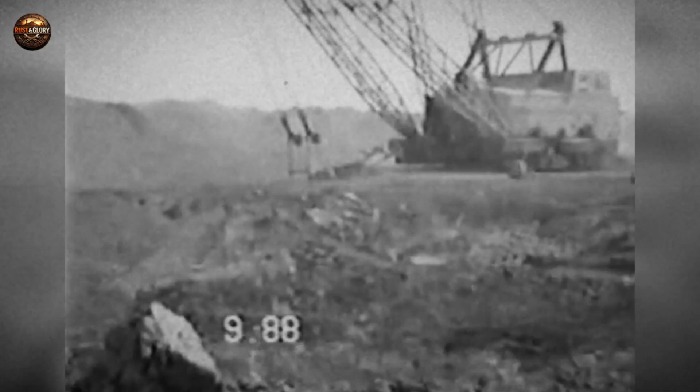In 1969, a machine stood up in Ohio. Not rolled, not crawled, not drove. It stood up. Two steel walking shoes lifted a machine the size of a 22-story building and set it down again, slowly, deliberately, like the earth itself had decided to move.

Its bucket could tear away 220 cubic yards at a time. Its body weighed roughly 13,500 short tons. When it crossed a coal field, it did not look like equipment. It looked like industrial civilization stepping out into the open and revealing what it really believed about the world. Its name was Big Muskie.

And the easy version of this story is that Big Muskie was the largest dragline ever built. That is true, it is also incomplete. Because Big Muskie did not come from a military giant, or a Silicon Valley fantasy, or a government moonshot. It came from a factory in South Milwaukee, Wisconsin, a lakefront industrial town of roughly 20,000 people. A place built around a company that started with an abandoned foundry, a banker who could read patterns, and a master mechanic who could turn those patterns into steel.

That company survived the collapse of one century and the rise of another. It helped dig the Panama Canal. It built machines for two world wars. It created some of the largest self-propelled machines ever to move on land. It overexpanded, broke, restructured, consolidated an industry, got absorbed by a larger empire, and then watched its own factory fall silent in 2016 after 123 years of production.

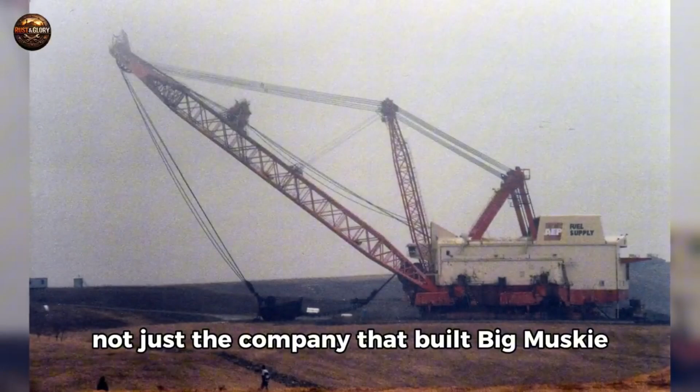This is the story of Bucyrus-Erie. Not just the company that built Big Muskie. The company that taught America how to move the ground beneath its own feet.

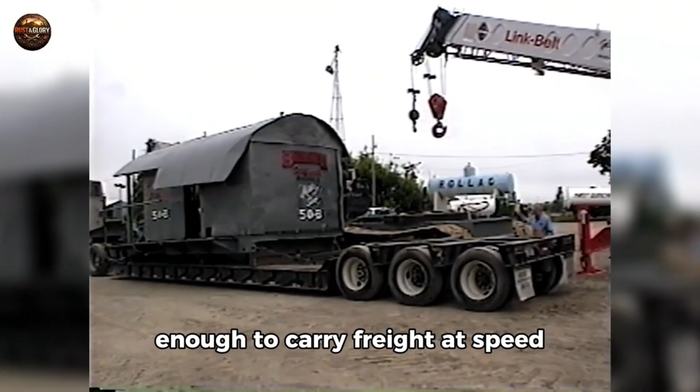The story begins in the 1880s, when the United States was not yet a settled industrial power so much as a country under violent construction. Railroad mileage exploded in the decades after the Civil War. New lines pushed westward, southward, and through places that, on a map, looked abstract until somebody had to cut through rock, grade a bed, lay track, and hold the whole thing stable enough to carry freight at speed. Every mile of railway represented an engineering problem, but it also represented an excavation problem, and excavation at continental scale was still primitive.

There were patents. There were ideas. There were a few builders. There was not yet a mature industry capable of meeting what the country was asking of it. That was the opportunity Daniel P. Eells saw. Eells was not a classic inventor-founder.

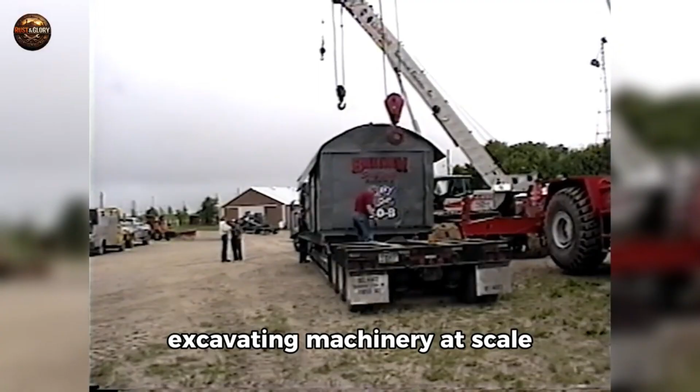He was a banker, an organizer, a man whose real gift was reading where future demand would outstrip present supply. He moved through rail and coal circles in Ohio, watched the way capital flowed, and learned something more valuable than mechanics, where the bottlenecks were. He understood that the United States was going to need far more digging power than its small collection of foundries and machine shops could provide. He also understood that whoever could build reliable excavating machinery at scale would not simply sell equipment. They would attach themselves to the physical creation of the country.

In December 1880, Eells and his associates acquired the abandoned Bucyrus Machine Company in Bucyrus, Ohio for $17,000. Even now that figure sounds modest. At the time it was still a gamble, but not a reckless one. The foundry existed. The rail connections existed. The industrial demand existed. What did not yet exist was the right product and the right technical leadership.

So Eells made the first great decision of the company's history. He hired John Thompson. If Eells was the pattern reader, Thompson was the mechanic. He knew machines from the inside out. He understood how metal behaved, how systems failed, how production translated drawing into object.

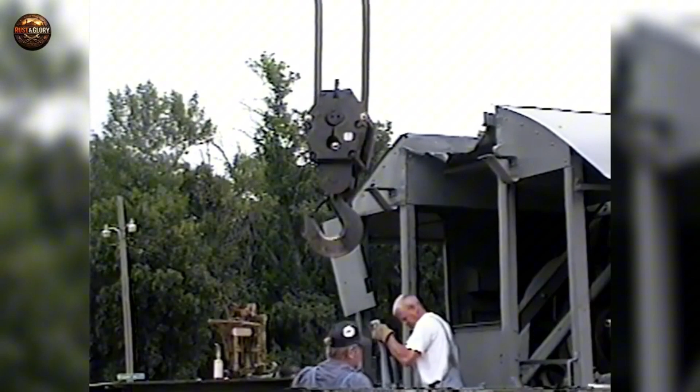The division between them was clear and unusually disciplined. Eells controlled capital, markets, and direction. Thompson controlled the technical core. Neither pretended to be the other. That mattered because many industrial companies destroy themselves by blurring genius and authority. Bucyrus began by separating them.

At first, the company made ordinary railroad hardware, wheels, switches, cylinders, handcars, solid work that paid bills but created no durable edge. Eells watched those years carefully and recognized the danger. Standard parts can keep a shop alive, but they also make it replaceable. Another shop can always learn to do the same thing. Another foundry can always bid slightly lower. A business like that survives on habit until the market decides habit is not enough.

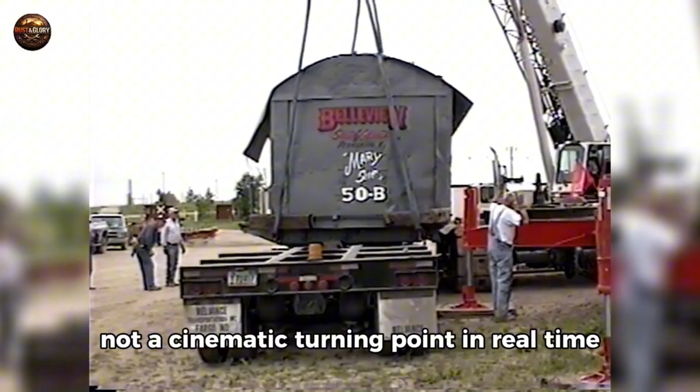The opening came with a railroad order for a steam shovel. Not a giant contract, not a cinematic turning point in real time. Just the kind of order that only becomes historic in hindsight. Steam shovels already existed, but the existing designs still carried serious limitations.

They were useful and clumsy at once. Thompson saw where they wasted motion. Eells saw what that wasted motion meant commercially. Thompson redesigned the machine around rotation and versatility. Instead of forcing the entire machine to reposition every time the digging direction changed, the upper structure could swing around its axis.

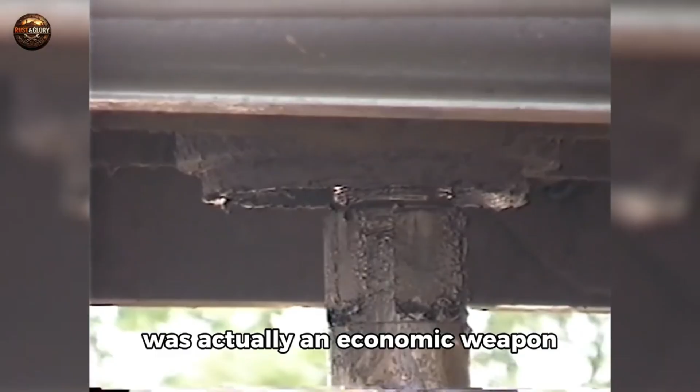Instead of serving one narrow role, the machine could function as both shovel and derrick. What looked like mechanical refinement was actually an economic weapon: less dead time, broader utility, more work per crew, more value per machine. Eells understood immediately what this meant.

He cut away the distractions. Standard railroad products were no longer the center of the business. The company would go deep, not broad. Shovels, cranes, dredges—nothing else deserved the same attention. That kind of aggressive specialization often looks reckless while it is happening.

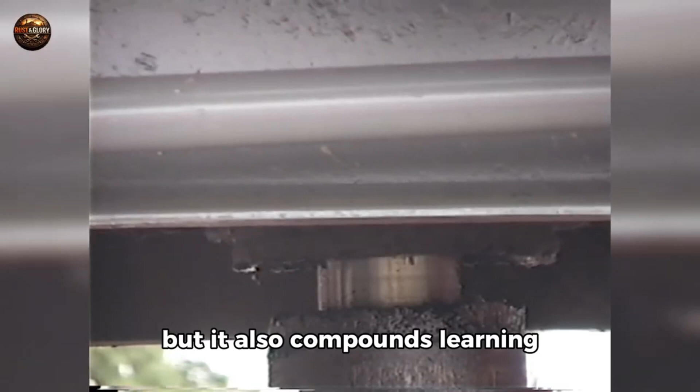It narrows revenue, increases dependence, and frightens cautious people. But it also compounds learning. Every machine teaches the next one. Every problem solved becomes a barrier for competitors. Every field repair becomes engineering memory. A company that keeps dividing its attention can stay busy. A company that concentrates it can become irreplaceable.

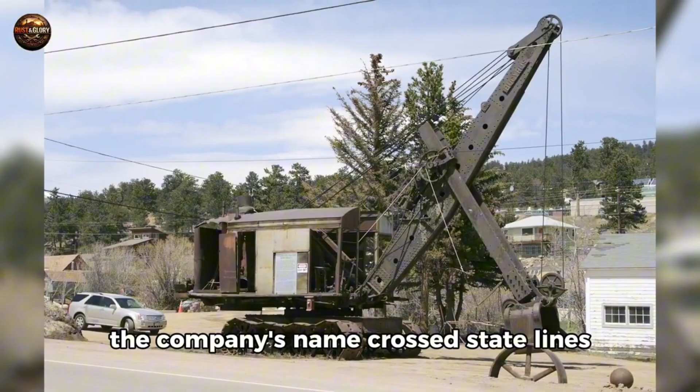In 1883, Thompson's consolidated steam shovel and derrick won first prize at the National Exposition of Railway Appliances in Chicago. The importance of that moment was not the medal itself. It was that a relatively small Ohio firm had publicly demonstrated that it was building excavating equipment of national significance. Orders began to move beyond local networks. The company's name crossed state lines. Reputation, once established in heavy industry, tends to travel farther than advertising ever can.

By the late 1880s, Bucyrus had extended into dredges as well. That move opened harbors, canals, riverwork, and a whole new class of infrastructure contracts. The machines were different in application, but the core advantage was the same. The company was developing deep, repeatable expertise in moving enormous quantities of material under difficult conditions. That, in the end, was the real founding product. Not a single shovel. Not a single patent.

A business model built around hard-to-copy competence. Eells had found the thing he was looking for when he bought an abandoned foundry: a moat made not of money, but of accumulated know-how. Success created the next crisis. The original Bucyrus Works in Ohio proved the company could build a market. It could not support the scale that market was demanding.

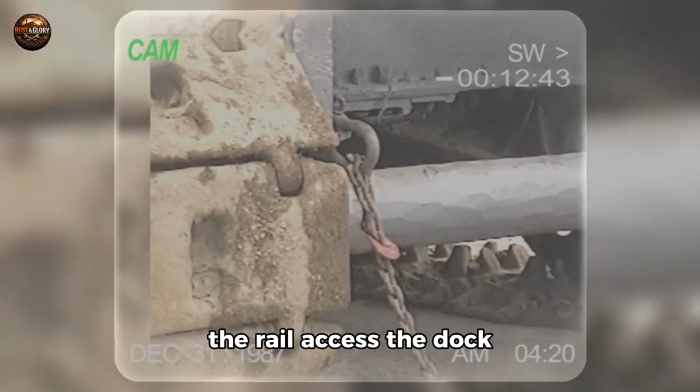The site was too constrained. Expansion land was limited. Transport options were inadequate for the size of the machines the company was beginning to imagine. Heavy industrial success has a physical requirement that modern business often forgets: you cannot scale large machinery abstractly. The building, the yard, the rail access, the dock, the craneage, the raw material flow, the assembly space—these are not background conditions.

They are the business. In 1891, South Milwaukee offered Bucyrus a future in one package: cash, land, dock access, rail access, worker housing opportunities. A city willing to move Chicago road itself to make the site workable. That last detail tells you almost everything. Municipalities do not reroute roads for ordinary tenants. They do it when they believe a factory is going to become the anchor of their future.

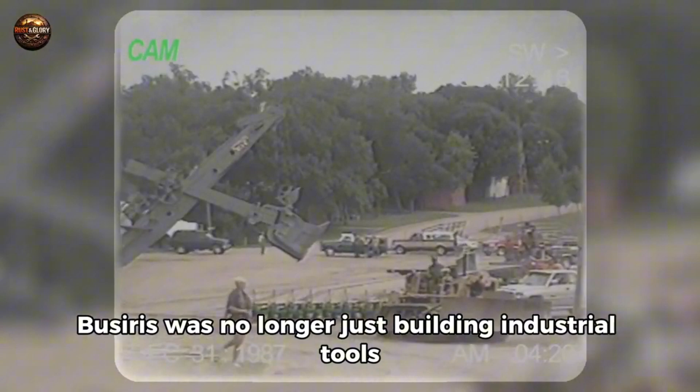Eells saw what South Milwaukee offered that Bucyrus, Ohio could not: access to both inland America and the wider world. Railroads carried heavy machinery into the continent. Lake Michigan linked the company to the Great Lakes and onward routes beyond them. Bucyrus was no longer just building industrial tools. It was building objects so large that geography itself had become part of the manufacturing equation.

The move was formalized in 1891. The new South Milwaukee operation opened in 1893. More than a relocation, it was a transformation. In Wisconsin, the company began to assume the form that would define it for more than a century: a self-contained heavy manufacturing complex tied intimately to a town that would grow around it.

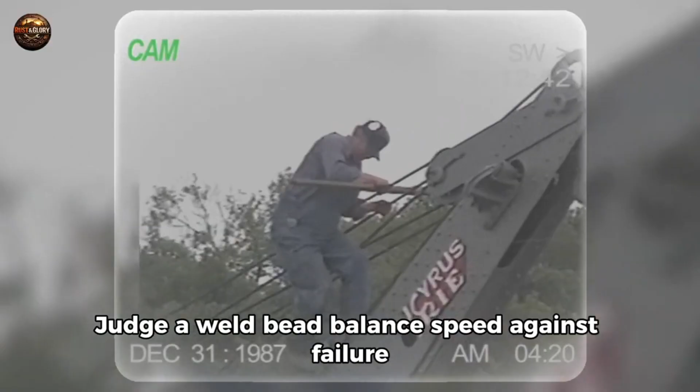The workers who filled the plant in its early decades were largely immigrants and the children of immigrants: Polish, German, Armenian, Bohemian, and others who brought with them not only labor but working traditions, mechanical habits, and foundry discipline. Industrial America is often narrated through products and executives, but factories are really memory systems carried in bodies. Somebody teaches somebody how to set a tolerance, pour a casting, listen for trouble in a drive, judge a weld bead, balance speed against failure. That sort of knowledge rarely appears in annual reports.

It is why some factories can survive shocks others cannot. Bucyrus understood early that labor stability was not a soft issue. It was a structural one. Between the 1910s and 1920s, the company did something unusual and profoundly strategic. It invested in the surrounding environment of work: homes, utilities, community infrastructure, the Bucyrus Club, and the broader civic fabric that helped bind workers to place.

This was not philanthropy in the sentimental sense. It was industrial statecraft at town scale. A worker who owns a house near the plant, whose children grow up in the local schools, whose neighbors also work at the same factory, is less likely to disappear the first time another employer offers a marginal wage premium.

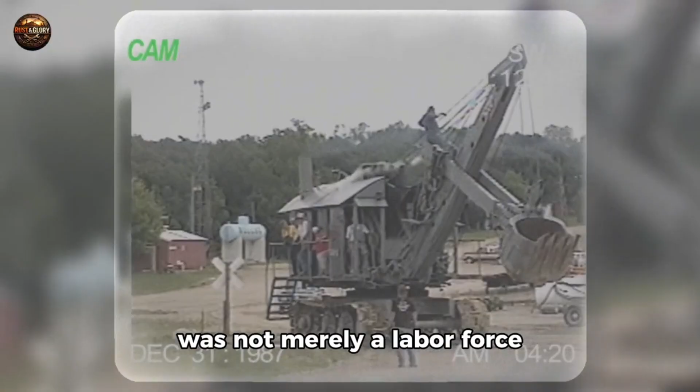What Bucyrus built in South Milwaukee was not merely a labor force. It built continuity. By the early 20th century, the plant had become an integrated industrial organism. Foundry, forging, fabrication, machining, assembly, shipping, as much as possible brought under one system, one roof, one culture. That mattered because the machines were increasing in size, complexity, and consequence.

Customers did not want a glamorous promise. They wanted equipment that worked in mud, water, frozen overburden, tropical heat, remote mines, and places where failure meant ruinous delay. Factories earn myth when they consistently do that kind of work.

The effect on South Milwaukee was total. Bucyrus became the city's dominant industrial fact. Generations moved through its gates. Street names, housing, local businesses, clubs, and civic identity all bent around the plant.

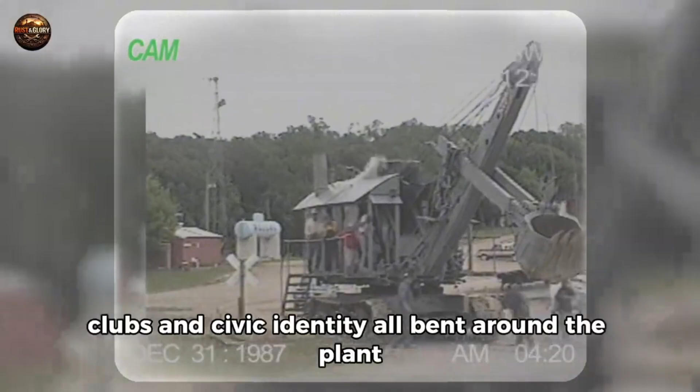This is the part of industrial history that often gets flattened into statistics. Payroll numbers matter. Output numbers matter. But what a great factory really does is organize time. Shifts determine traffic. Paydays determine downtown business. Hiring waves determine school enrollments. Retirements shape neighborhood age. The building becomes a clock and a center of gravity.

When people later said South Milwaukee did not simply lose jobs when the plant went silent, they were saying something precise. They were saying the city lost the institution around which ordinary life had been arranged for over a century.

That sort of dependence is dangerous. It is also exactly what made the place powerful. Because once the town and the factory were bound together, Bucyrus could accumulate something even more valuable than contracts: intergenerational skill. Sons followed fathers. Sometimes daughters followed mothers. The work culture thickened. The company became better because the town kept feeding it people who had already spent years hearing about the machines at dinner tables and seeing what factory discipline looked like from childhood.

Modern management language would call this a talent pipeline. South Milwaukee called it life.

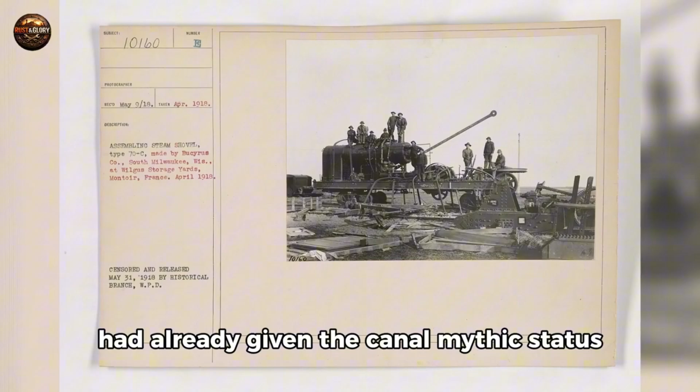There are contracts that pay well, and there are contracts that permanently alter how the world perceives you. For Bucyrus, that contract was Panama. The French failure in the 1880s had already given the canal mythic status before the United States even took over. Disease, landslides, corruption, mud, heat, and engineering overconfidence had turned the project into one of the great modern cautionary tales.

When the United States assumed control in 1904, the canal became more than an infrastructure project. It became a national demonstration of competence. The task was straightforward on paper and brutal in practice. Cut through unstable tropical terrain, remove staggering quantities of material, control disease, and prove that American industry could finish what European ambition had not. What the canal needed was not just manpower.

It needed dependable digging power on a scale large enough to convert ambition into measurable excavation. Bucyrus became central to that effort. The figures are still striking more than a century later. Bucyrus supplied 77 of the 102 steam shovels used on the Panama Canal. That meant roughly three-quarters of the mechanical excavation power on the most important construction project in the world came from one factory in South Milwaukee.

When you combine heritage lines later absorbed into the company, the institutional footprint is even larger. But even using the cleanest conservative number, the dominance is obvious. These were not ornamental machines. They were 95-ton working beasts with 5 cubic yard buckets, mounted on temporary rails and operated in conditions that punished both metal and muscle.

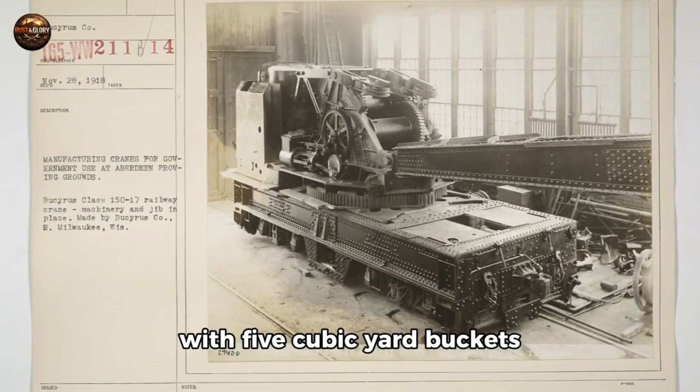Crews labored through tropical heat and mud, moving track as the machines advanced, feeding boilers with coal, maintaining operation amid a landscape that collapsed without warning. Landslides at Culebra Cut could bury equipment and erase days of progress overnight. Every ton removed had to be wrestled out of a living geology that refused to stay where it had been cut.

This is why Panama mattered so much to Bucyrus's reputation. The canal was not a clean technical demonstration. It was a chaos test. A machine that performs under controlled conditions proves good engineering. A machine that performs in Panama proves something closer to legitimacy.

The output numbers tell that story with more force than rhetoric can. In March 1910, a Bucyrus shovel at Culebra Cut excavated around 70,000 cubic yards in 26 days, a project record. Across the life of the canal job, individual Bucyrus machines averaged over 1 million cubic yards moved. These were extraordinary performances not because they were achieved in calm conditions, but because they were achieved in one of the worst work environments on Earth.

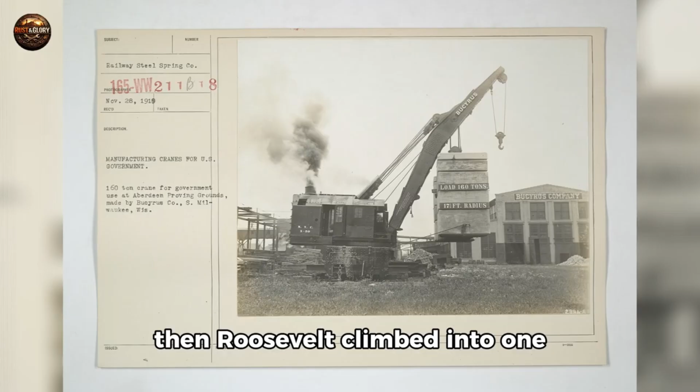Then Roosevelt climbed into one. In November 1906, Theodore Roosevelt visited Panama and sat at the controls of a Bucyrus shovel. The photograph of the president on that machine became one of the iconic images of the canal era. It worked as politics, theater, and advertising all at once.

Bucyrus did not need a slogan after that. If the President of the United States wanted to be seen inside your machine while inspecting the greatest construction project of the age, your brand had already crossed into symbolic territory.

Panama did not make Bucyrus technically capable. It proved that capability at the highest level available. And once that proof entered the world, the company's market position changed. It no longer had to argue from theory. It could argue from fact.

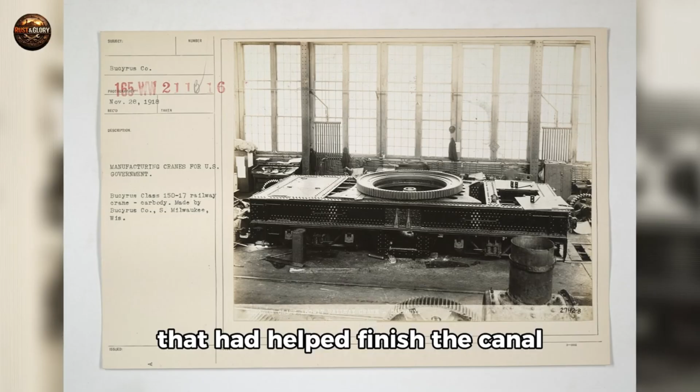These were the machines that had helped finish the canal. These were the machines that had survived tropical slides, punishing cycles, and round-the-clock work while the world watched. Every future sales conversation took place in the shadow of that achievement.

That is how reputations become industrial assets. They lower customer anxiety. They justify premium pricing. They attract talent. They turn a regional manufacturer into a world reference point.

Panama also clarified a deeper truth about Bucyrus that would remain true into the age of Big Muskie. The company's real product was not merely machinery. It was large-scale reliability under harsh conditions.

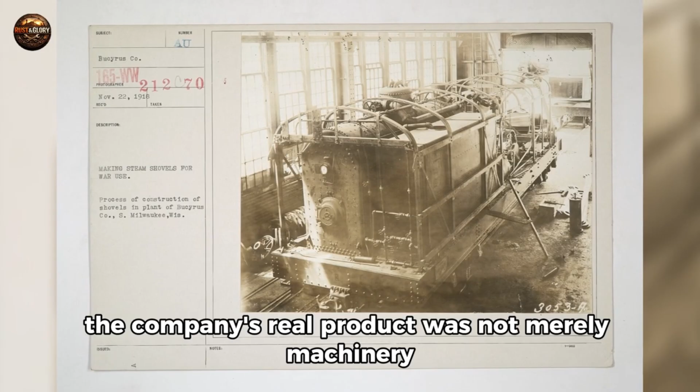Plenty of firms can build something impressive once. Far fewer can build systems customers trust when delay costs millions, failure destroys schedules, and replacement is not practical. By the time the canal opened in 1914, Bucyrus had crossed that threshold.

The company was no longer just an American excavating manufacturer with a strong catalog. It had become one of the names by which the world understood heavy excavation itself. That status would carry it through two wars, multiple technological transitions, the rise of strip mining, and the age when size itself became the next battlefield.

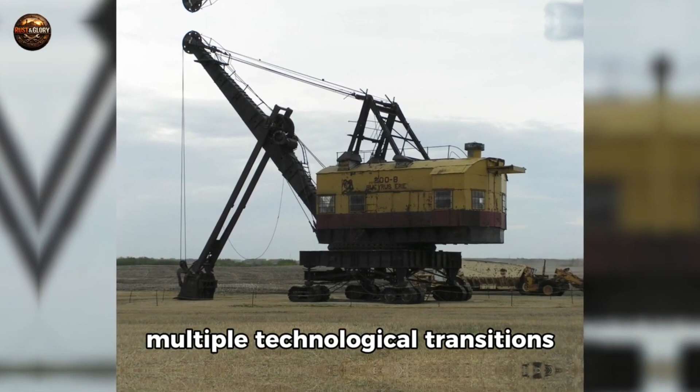Factories reveal their real character when the world changes faster than they expected. For Bucyrus, the first great stress test after Panama was war. The First World War shattered the peacetime logic of industry.

Plants that had specialized in building one class of machinery were suddenly asked to produce something else entirely: artillery components, logistics equipment, precision metal parts for military systems that could not tolerate improvisation. Bucyrus had not been founded to build weapons, but it possessed the two attributes wartime production valued most: precision and adaptability.

It could machine accurately, scale quickly, and reorganize without forgetting what it already knew. During the war years, the company turned significant portions of its capacity toward military output, including shell work, recoil components, railroad equipment, and heavy systems that made modern industrial war possible.

The deeper lesson was not what specific parts it built. It was that the factory could reconfigure itself at speed without collapsing into disorder. That ability matters in heavy industry more than people sometimes realize.

Large factories are not nimble by default. Their strength is repetition. Their danger is rigidity. Bucyrus repeatedly avoided that trap because its internal culture was built around engineering problem-solving rather than mere line repetition. The workforce understood metal, fit, load, and failure at a level that let management redirect production without starting from zero.

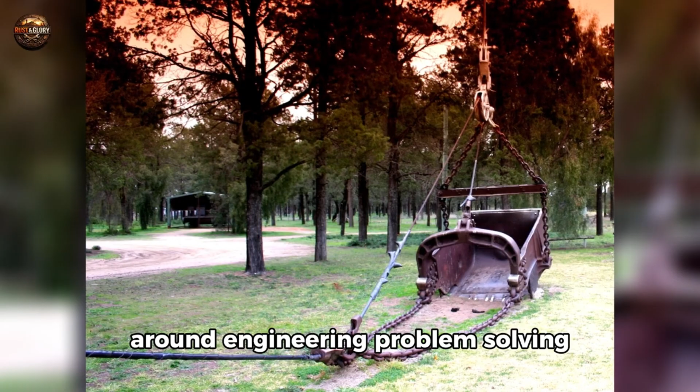When the war ended, Bucyrus did not simply return to normal. It returned with a sharper sense of what the future of excavation required. Steam had carried the company far, but steam also imposed limits.

It required constant management, fuel handling, warm-up, and a relationship between operator and power source that was inherently less stable than what electrification promised. At the same time, excavation itself was evolving. New mines, new terrains, and larger surface operations demanded machines that were not just powerful, but mobile and predictable.

Several developments in the 1910s and 1920s pushed Bucyrus toward a new era. The first was the dragline. Dragline logic changed the relationship between machine and material.

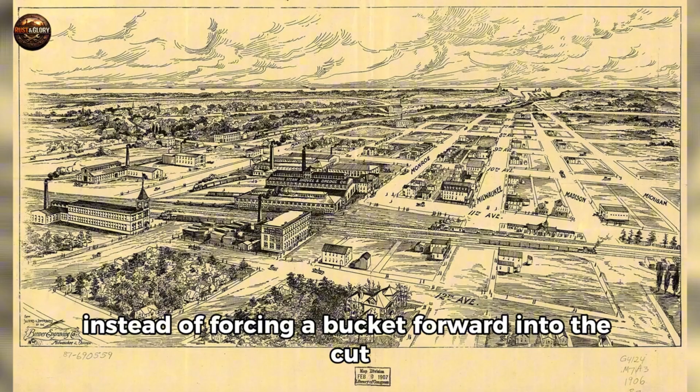Instead of forcing a bucket forward into the cut, the machine cast it out and dragged it back. That sounds like a technical distinction fit for engineers, but it opened enormous commercial possibilities. Soft ground, waterlogged sites, and stripping operations where push-style excavation became inefficient all suddenly favored a different family of machines.

Bucyrus's acquisition of rights and technologies in this space was not just an addition to the catalog. It was a recognition that surface mining was beginning to demand different motion.

The second shift was mobility. Tracked crawlers liberated machines from the tyranny of temporary rails. Rail-mounted excavation had been effective, but it also imposed its own slow ritual of movement: lay track, advance, reset, repeat. Crawler systems allowed machines to reposition without rebuilding infrastructure beneath them at every step.

In mining, that meant time. In construction, that meant flexibility.

In sales, it meant a company could promise something new, not merely power, but maneuverability at scale. The third shift, and perhaps the most consequential, was electricity.

Steam did not disappear overnight, but electrical systems offered advantages that became impossible to ignore. Torque arrived differently. Output steadied. Fuel logistics simplified. Operating precision improved. Maintenance regimes changed. What had once been a great steam engineering company began to become something else: a builder of

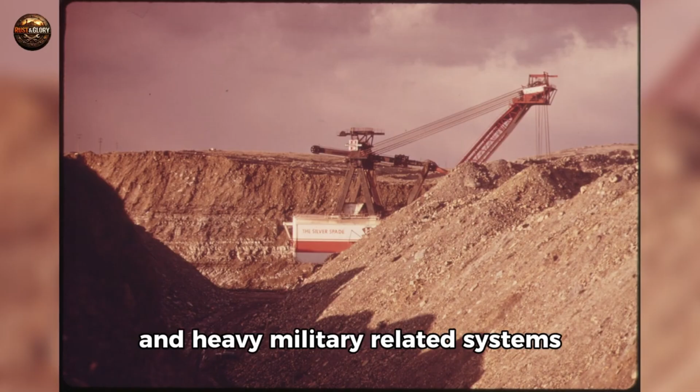The point is not to romanticize wartime conversion. It was disruptive, exhausting, and imposed from outside. But it confirmed a pattern that had now defined Bucyrus for decades. When the world changed suddenly, the company did not freeze. It reorganized.

After 1945, that mattered enormously. The post-war years were not simply about reconstruction. They were about scale. Demand for minerals, energy, steel, infrastructure, and mass movement of earth expanded with extraordinary force. The machines customers wanted in the late 1940s and 1950s were bigger, more durable, and more specialized than the ones

the company had sold before the wars. Bucyrus was ready not because it had predicted every detail, but because the wars had forced it to become a factory capable of changing form without losing identity. This is the crucial distinction. A factory can be flexible because it lacks a center, or it can be flexible because its center is strong enough to survive change. Bucyrus belonged to the second category.

It remained, through all those transitions, committed to one basic domain: moving impossible amounts of earth and material with machines that had to work under conditions where excuses were worthless. By the middle decades of the 20th century, the company had accumulated something very few manufacturers ever do. It had a reputation, a workforce culture, and a technical base robust enough to absorb shocks while still pushing into new frontiers.

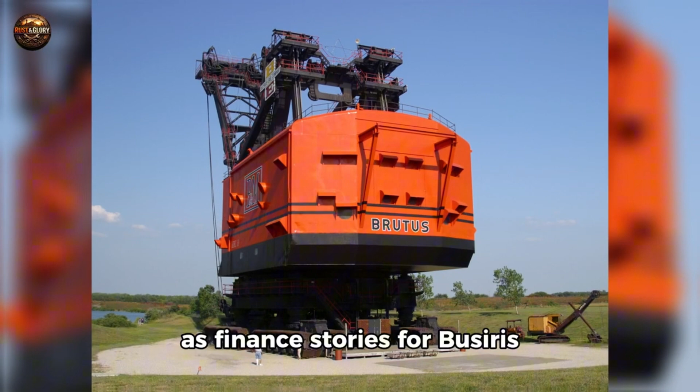It knew how to build large excavation equipment, how to manage a major industrial works, and how to sell into infrastructure and mining markets around the world. But strength is not the same as control. To control an industry, you have to reduce the number of things customers can buy somewhere else. Bucyrus did that with remarkable patience.

Earlier mergers and combinations had already expanded its reach, but the 1927 union with Erie Steam Shovel Company was the decisive symbolic and operational shift. Erie was not a minor player. It was one of the principal names in excavation equipment, especially in smaller and mid-sized ranges where Bucyrus had not always dominated as completely. When the two combined, the meaning of the business changed.

This was no longer a company with pockets of excellence. It was becoming a spectrum supplier, able to meet radically different excavation needs under one identity. The new name, Bucyrus-Erie, reflected that consolidation, but the real importance lay beneath the lettering. Customers who might once have had to choose between specialist niches could increasingly remain within one industrial family.

Then came the international dimension. The partnership with Ruston and Hornsby in Britain extended the company's reach into global markets in a way that simple exporting never could. Exporting sends products abroad. Joint ventures embed industrial presence. They create local distribution, support, production logic, and market trust. For a heavy equipment company, that difference is enormous.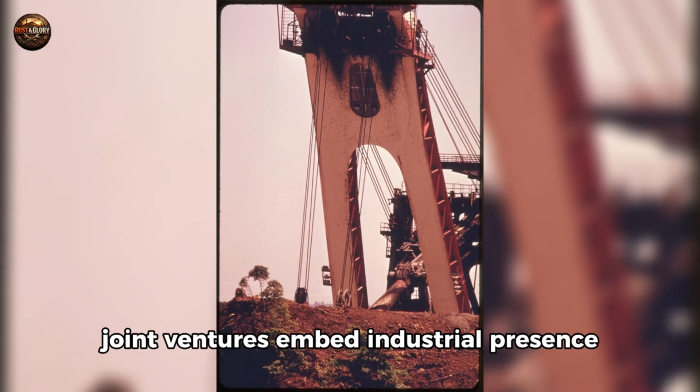You are not shipping clocks or clothing. You are selling machines that require service, parts, field credibility, and confidence that the manufacturer will still be there when the machine needs support years later. Bucyrus understood this early. The company's acquisitions in the 20th century also reveal something about how it thought.

It did not only buy rivals. It bought missing capabilities. Walking dragline technology was a perfect example. Large machines have a mobility problem. Tracks can bog down. Wheels become absurd. Ground pressure becomes intolerable. Walking systems solved a problem that did not matter at small scale and mattered enormously at giant scale. When Bucyrus brought that technology inside its own world, it was not diversifying.

It was eliminating a weakness. The same logic applied to blast hole drills. Before rock is moved, it is broken. Before explosives are placed, holes must be drilled. Owning that capability meant Bucyrus could participate not just in excavation after blasting, but in the earlier stages of the entire mining cycle. The company moved one step closer to system coverage.

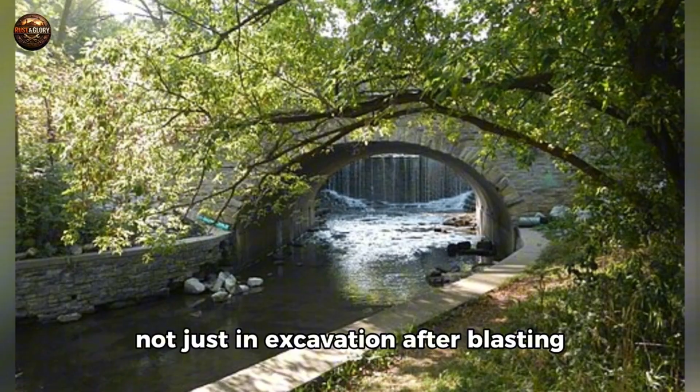Hydraulic excavator technologies and smaller machine segments mattered for the same reason. A company that only dominates the uppermost end of scale can still be strategically incomplete. Customers do not always want the largest possible machine. They want the right machine. Bucyrus spent decades pushing toward a position where the answer to more and more excavation and mining problems could be found inside its own product universe.

This is one reason the company's later rise to apparent near-total mining coverage did not happen suddenly. It was the result of long accumulation. Capability, then adjacency, then control. By the post-war decades, Bucyrus-Erie was not just a manufacturer that happened to own a few strong product lines. It had become one of the central organizing firms in heavy excavation and surface mining. Whether through direct production, heritage technology, or acquired competencies, it touched more of the workflow than many customers even fully recognized.

That status also changed how the company thought about size. Once you stop treating equipment categories as isolated products and start treating them as connected solutions, scale begins to seem less like spectacle and more like inevitability. If the market needs bigger overburden removal, you can build bigger overburden removal. If mobility at that size becomes impossible, you acquire or develop mobility systems. If geology changes the sequence of work, you move upstream or downstream in the process.

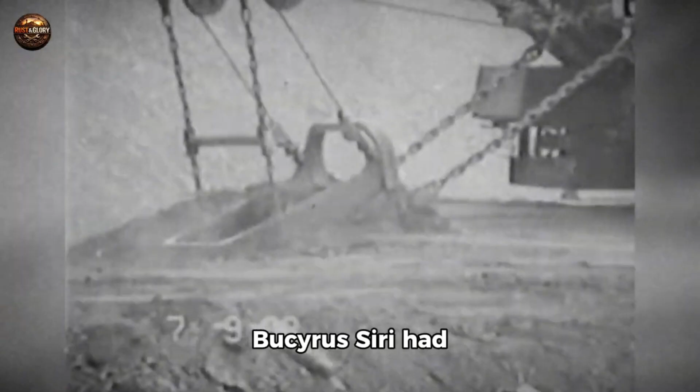By the 1950s and early 1960s, Bucyrus-Erie had become one of the few industrial companies on Earth capable of answering heavy excavation questions with something more than a catalog. It could answer with a system architecture. That is what made the age of giant stripping shovels and draglines possible. Not just raw engineering boldness, but institutional breadth. The company had built the capability base required to ask a very dangerous question: if the mine wants something larger than anything that currently exists, why shouldn't we be the ones to build it?

By the middle of the 20th century, Bucyrus-Erie was no longer just known for what it built. It was known for the place that built it.

Heavy equipment factories are easy to imagine abstractly and difficult to picture accurately. People hear the names of giant machines and tend to imagine empty heroics: cranes moving impossible components in silence, sparks, giant parts, men in hard hats staring upward at steel. Real factory life is less theatrical and more impressive. It is systems, sequencing, repetition, smell, noise, skill, patience, and the accumulated judgment of people who know when metal is behaving correctly and when it is not.

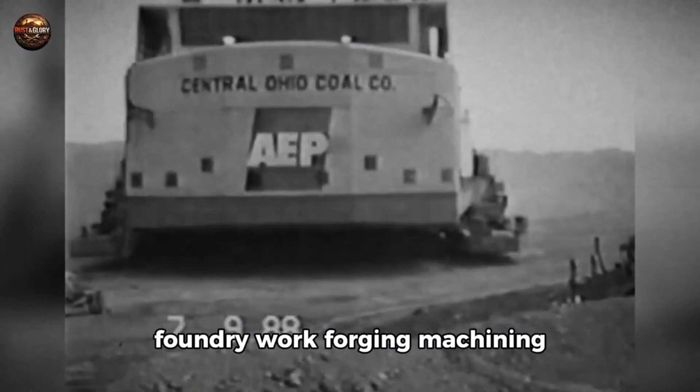The South Milwaukee Works had become one of those places. By the early and middle decades of the 20th century, the plant operated less like a simple assembly facility than like a contained industrial ecosystem. Foundry work, forging, machining, heat treatment, fabrication, heavy assembly, fitting, field preparation, and shipping all existed as linked domains inside one larger logic. Some workers spent careers in one domain. Others moved between them. Either way, the knowledge environment thickened over time.

A pattern maker understood castability. A machinist understood finish and fit. A welder understood sequence and stress relief. An assemblyman understood not just how a part attached, but why it had been made that way in the first place. That density of understanding is one reason so many historic factories become difficult to replace. Their output can sometimes be copied. Their internal human system cannot be conjured on demand.

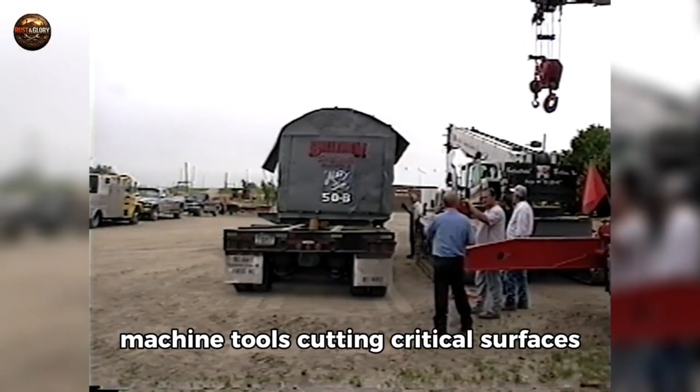Imagine the place in its productive maturity. Raw steel arriving and disappearing into sequences of transformation. Castings cooling with their own heat still living inside them. Machine tools cutting critical surfaces that would later carry staggering loads. Huge components moving through bays where overhead cranes did not feel like luxuries, but like extensions of the building's nervous system. The smell of foundry sand, hot metal, oil, flux, paint, lake air, and machine heat mixing into that distinct industrial atmosphere workers carry home in their clothes without noticing until their families do.

There would have been sounds layered constantly over one another: hammering, machining, crane motion, shouted signals, forklifts, the grind of preparation, the ring of steel on steel, and the low conversation of people who know each other well enough not to waste words. Great factories are not quiet because so much of their intelligence is acoustic. A good machinist hears chatter before he sees damage. A good fitter hears misalignment in the way weight settles.

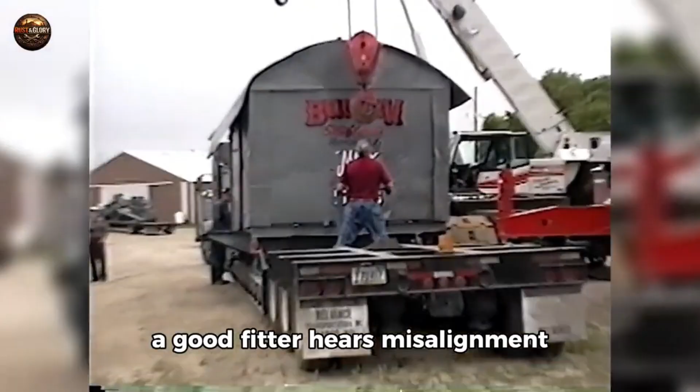A veteran worker can tell the difference between strain and normal operation by the sound a component makes when a crane takes it up. This is what outsiders often miss about industrial labor. The work is physical, yes.

It is also interpretive. Bucyrus-Erie's South Milwaukee workforce carried that interpretation across generations. The city's own historical material says plainly that many families sent workers into the plant across third and even fourth generations. That kind of continuity does not merely stabilize staffing. It shapes identity. A young worker enters not as a blank slate, but as somebody who has grown up hearing stories about the plant, who may already know the names of departments, foremen, buildings, and machine families before the first day on the payroll.

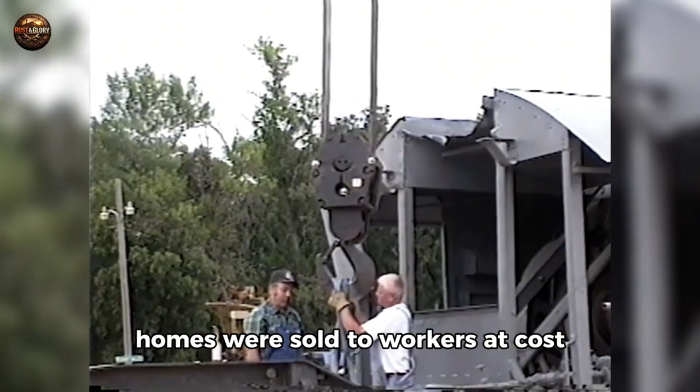That is why company towns and anchor factory cities carry such deep memory. They do not just host jobs. They host inherited belonging. The company reinforced this for decades. Homes were sold to workers at cost. The Bucyrus Club offered recreation and civic life. Downtown patterns adjusted around shift schedules and wages. The plant did what all large industrial centers do when they are healthy for long enough. It turned the town around itself into a support structure, and in turn drew strength from that support structure.

There is also a moral complexity here worth acknowledging. Factories that dominate towns produce belonging and dependency together. The same arrangement that builds pride can trap communities when the center fails. A generation raised to think of one plant as the natural destination of adult life can find itself unmoored when that plant no longer exists.

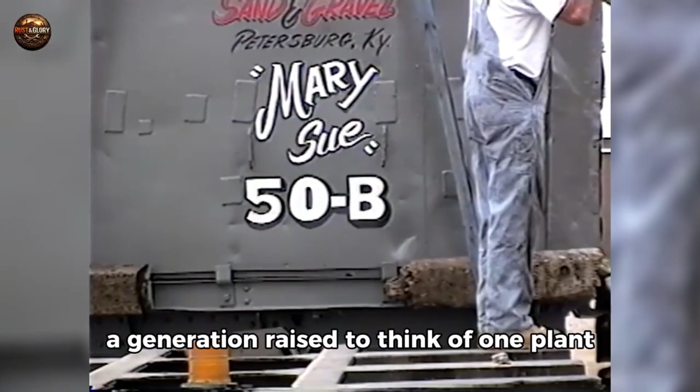Bucyrus gave South Milwaukee stability. It also made South Milwaukee structurally vulnerable to what would later happen. But that vulnerability is part of the story because it is part of what made the place so formidable when it was alive.

At the height of the works, the plant did not feel like a branch office. It felt like the thing the town existed to support, and the thing that justified the town's sense of itself. Men and women there were not making generic goods. They were building machines that went to Kansas, Ohio, Panama, Minnesota, Canada, Australia, South Africa, and anywhere else immense quantities of earth had to be moved. World geography passed through South Milwaukee in reverse, as orders, field reports, service needs, and engineering adaptations.

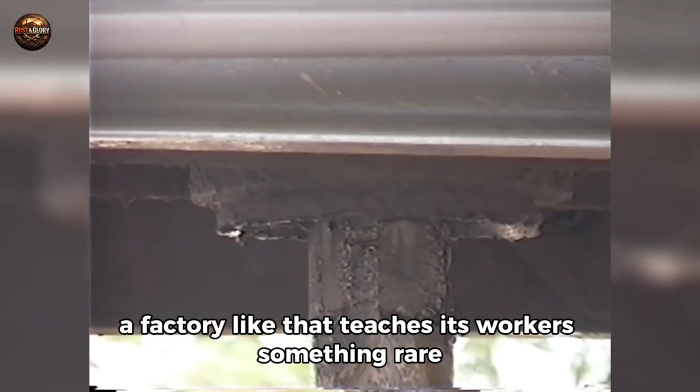A factory like that teaches its workers something rare, that the object under your hands is going somewhere hard. That knowledge changes how people work. A cabinet in a furniture plant matters. A gearbox housing on a giant shovel matters differently when you understand that it may spend decades in an environment where failure costs fortunes and help is days away. Bucyrus machines earned their reputation partly because the factory culture understood that field seriousness. These were not products designed for ideal conditions. They were built for hostile ground and punishing duty cycles.

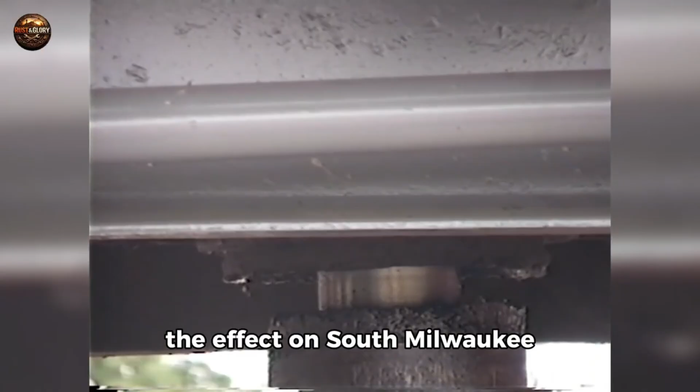The effect on South Milwaukee lasted well beyond the payroll. It shaped self-respect. It shaped what the city imagined industry was. It shaped what counted as real work. It shaped what older generations told younger ones about competence, toughness, and staying power. Which is why when the plant finally fell silent, the loss was not just the absence of production noise. It was the sudden interruption of a social world in which that noise had meant continuity.

There is a point in any mature industry when technical improvement stops looking incremental and starts looking mythic. For Bucyrus-Erie, that point arrived in the 1960s. The company had already spent decades building larger machines, but the machines of this era crossed a psychological threshold. They no longer felt like enlarged tools. They felt like industrial landforms, structures so big that language itself struggled to hold them properly.

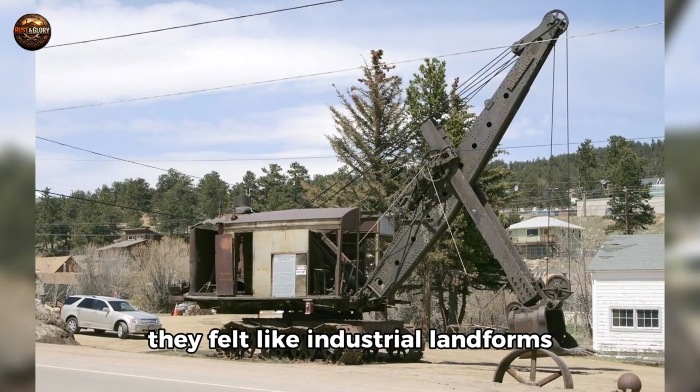A bucket was no longer a bucket. It was a room. A boom was no longer a boom. It was a horizontal tower. A shovel was no longer a piece of equipment. It was an environment. The 3850 B was part of that transition. So was the 1850 B, later known as Big Brutus. So were the Silver Spade and the GEM of Egypt. Each of them matters for its own reasons. Together they reveal what the company had become.

Take Big Brutus first. Delivered to Kansas in the early 1960s, Big Brutus was not the largest machine the company ever built, but it occupies a special place in the public imagination because it survived. It had to be dismantled in South Milwaukee, shipped in huge sections by rail, and reassembled on site, an operation that itself demonstrated the strange physics of this industry.

These machines were so large that transport became its own project. Once erected, they tended to stay where they were. You did not casually relocate a machine like Big Brutus. You either found new work for it in the same territory or you left it where it stood.

That permanence did something to people who saw these machines in service. They ceased to feel temporary. They seemed instead like civic facts, as fixed in the landscape as grain elevators or church steeples.

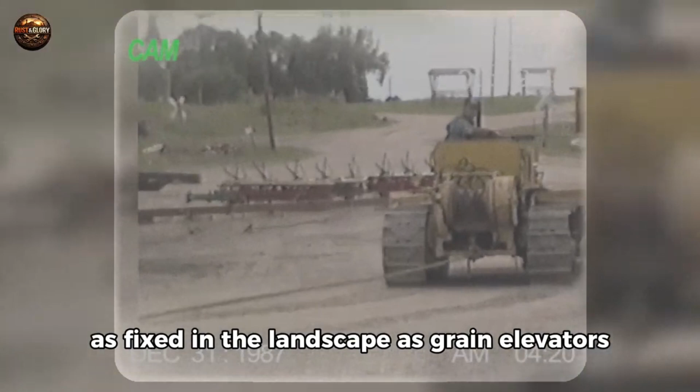Then there was the Silver Spade and its twin, the GEM of Egypt. These machines pushed output and mass to a point where world records began to blur together. In another era, each would have defined the outer limit of practicality.

In the Bucyrus-Erie world of the 1960s, they were part of a continuing escalation. This is the key to understanding the company at its peak. Gigantism was not a publicity stunt. It was a response to economic logic in strip mining and overburden removal. If a machine can move more material per cycle and operate economically over vast mine lives, then size becomes rational, until the surrounding economics fail.

But before they failed, the logic looked irresistible. Mining companies wanted enormous overburden stripped faster and cheaper over decades. Power demand was rising. Coal seemed secure. Scale appeared to answer everything. Bucyrus-Erie was the company best positioned to translate that demand into steel.

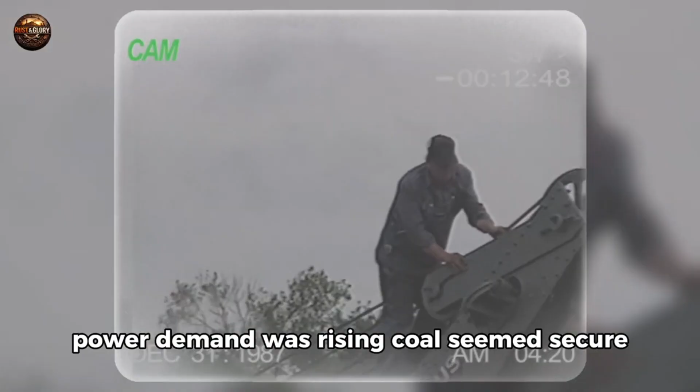By this point, the South Milwaukee works had become a place where extraordinary things could be normalized. That is one of the hidden features of great factories. They change what feels ordinary to the people inside them. Somewhere else a machine the size of Big Brutus would be treated as a once-in-a-generation impossibility. In South Milwaukee it became another job, difficult, prestigious, technically intense, but still a job.

Drawings had to be finalized. Components had to be fabricated. Shipping had to be coordinated. Assemblies had to fit. Field erection had to succeed. Myth outside, workflow inside. And then the requests got larger still.

This is where Big Muskie enters, but it is important to see that Big Muskie did not emerge from nowhere. It emerged from a decade in which Bucyrus-Erie had already taught itself, and its customers, that enormous size was not only possible but commercially meaningful. The company had been building toward a machine like Big Muskie long before the Ohio contract made it real.

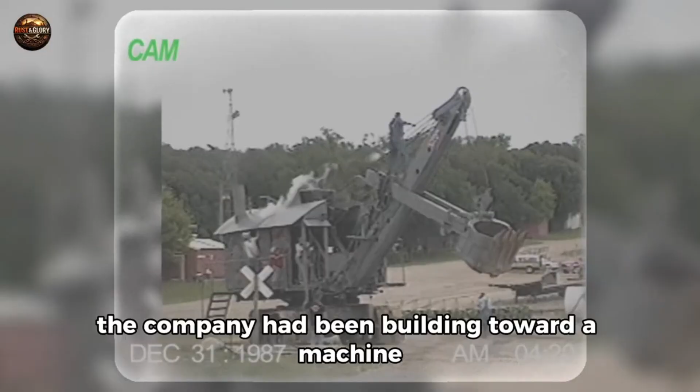The public tends to remember these giant machines as isolated marvels. The truth is less romantic and more impressive. They were the visible tips of a much deeper industrial system: metallurgical judgment, fabrication scale, field erection logistics, electrical engineering, structural design, customer trust, and a workforce accustomed to translating absurd specifications into working equipment.

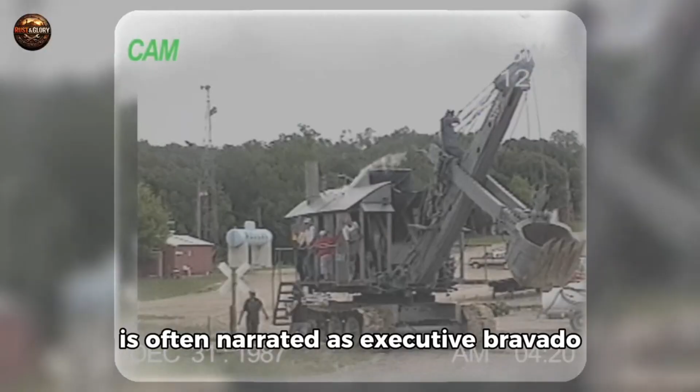That last point matters. Industrial gigantism is often narrated as executive bravado or engineering ego. In reality, it is also a labor story. Somebody had to lay out the steel, cut it, fit it, weld it, machine the critical surfaces, manage distortion, keep tolerances where they mattered, and then help erect the whole thing in the field. Somebody had to solve the 1,000 unglamorous problems that stand between a contract drawing and a working machine.

The people in South Milwaukee did that again and again. This is why the plant mattered so much to the town. It did not merely employ workers. It employed workers in a system capable of world-historic difficulty. When those workers built a giant stripping shovel or a massive electric machine, they were not just earning a wage. They were participating in a level of industrial capability very few places on Earth possessed.

That is what the Age of Giants really represented. Not just bigger buckets. A factory culture capable of making the improbable routine. Big Muskie was the moment when that factory culture reached its most audacious expression.

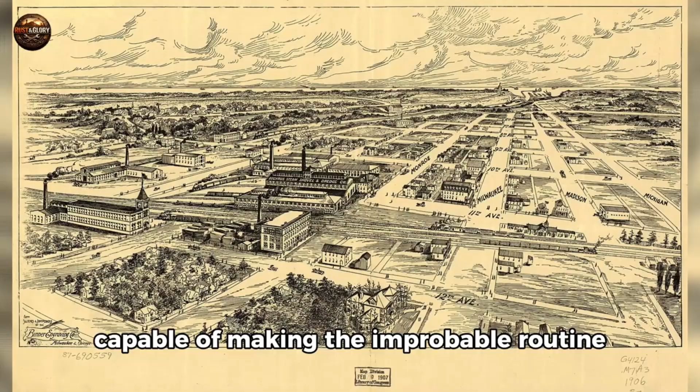The common headline version is easy to remember. Largest dragline ever built. 220 cubic yard bucket, roughly 13,500 short tons, around 22 stories high, operating in Ohio from 1969 to 1991, later dismantled in 1999, with only the bucket preserved. All of that is true. None of it fully captures what Big Muskie meant.

To understand Big Muskie, you have to understand the problem it was built to solve. The mine in Ohio was vast, hilly, and economically defined by overburden. Large volumes of earth had to be stripped to expose the coal below, and the existing fleet options were not optimal for the terrain and scale involved.

The mine's owners did not ask for a piece of spectacle. They asked for a machine that could move extraordinary quantities of earth more profitably than the available alternatives. Bucyrus-Erie answered in the only way a company like that could answer by the late 1960s. It designed a machine so large that the ordinary vocabulary of mobility stopped working.

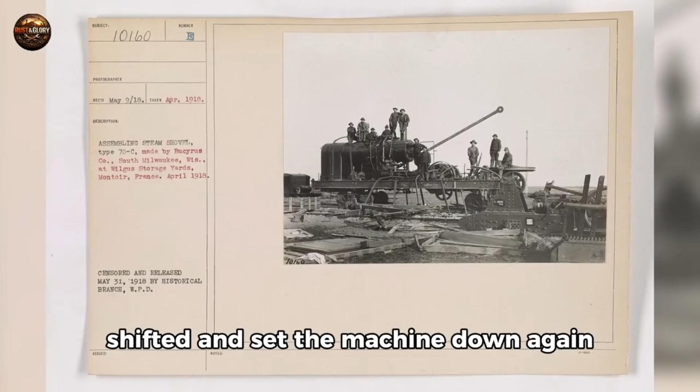Big Muskie did not roll into place like a truck. It did not travel like a crane. It was built for a single operating environment and moved by walking. Two massive shoes lifted, shifted, and set the machine down again over and over. Every step looked slow enough to seem almost ceremonial, but the slowness was deceptive. This was not graceful motion.

The dimensions still sound unreal because they were. A boom over 300 feet long. A bucket capable of holding 220 cubic yards. A total mass that approached twice the weight of the Eiffel Tower's iron structure. A machine length stretching hundreds of feet. An electrical appetite so immense that Big Muskie operated less like a vehicle than like a mobile industrial district connected to the grid.

And yet, for all that scale, the essential act was simple. Cast the bucket. Drag it through the earth. Lift. Swing. Dump. Repeat. That repetition is worth dwelling on because it is the thing giant machines always reduce to. No matter how extraordinary the size, the work becomes a rhythm. Operators learn the cycle. Crews learn the maintenance. Managers learn the productive pace. A machine that seems impossible from a distance becomes, for the people living with it, a demanding routine.

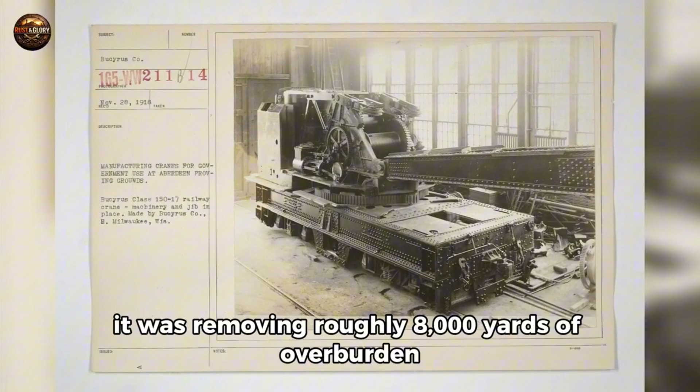Big Muskie entered service in 1969 and worked for 22 years. In 1976, according to Caterpillar's later historical account, it was removing roughly 8,000 yards of overburden per operating hour. Over its service life, it moved a quantity of material so vast that comparisons to the Panama Canal stopped being rhetorical flourish and started looking numerically useful.

Big Muskie did not set records accidentally. It embodied a whole industrial philosophy: that when confronted with a large enough excavation problem, the rational answer might simply be to build a machine larger than anyone has ever built. No one has since. That is part of what gives Big Muskie its strange afterlife. It was not merely the biggest of its time. It appears, at least so far, to have belonged to the end of an era in which such size still looked like the future rather than a dead end.

Later mining innovation would pursue efficiency, flexibility, systems integration, and different equipment mixes. The idea that the path forward necessarily meant bigger and bigger single-bucket earthmovers did not survive intact. Big Muskie therefore stands as both culmination and warning. Culmination because it represented the outer edge of what Bucyrus-Erie and its industrial ecosystem could do. Warning because it tied success to a set of assumptions about energy, mining, land use, and capital expenditure that would eventually prove unstable.

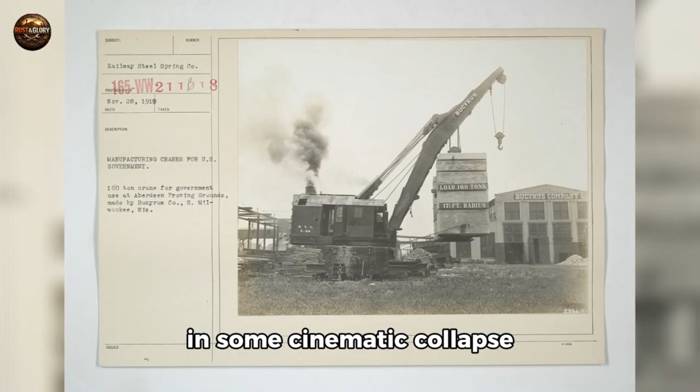Even its end tells that story. Big Muskie did not die because it mechanically failed in some cinematic collapse. It shut down in 1991 because the economics no longer justified keeping it alive. When it was finally dismantled in 1999, the reason was not physical impossibility alone but rational cost. There was no profitable world in which preserving the whole machine made sense. So the steel went to scrap and the bucket survived as relic.

That survival matters. People can stand inside the bucket today and experience, at least briefly, the scale of the vanished whole. But the bucket is also a lesson in industrial memory. Great systems often leave behind only fragments. A photograph. A casting plate. A preserved cab. A bucket in a park. The working totality disappears first because it is too large, too expensive, too entangled with dead economics to remain intact.

Big Muskie's afterlife therefore mirrors Bucyrus-Erie's own. The full machine is gone. The proof that it existed remains. And the fact that nobody has surpassed it tells you something uncomfortable and magnificent at the same time. South Milwaukee built the largest walking dragline the world has ever seen, and the world has not decided to do it again. That is not just a record. It is evidence of where an entire industrial civilization once believed its future was heading.

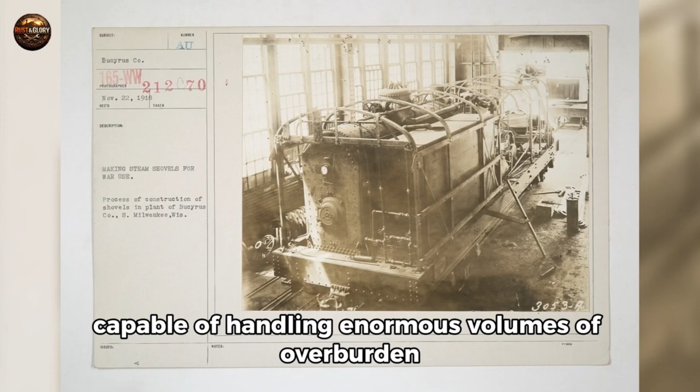It is easy to turn Big Muskie into folklore. It is harder and more worthwhile to remember that it had to be engineered, fabricated, shipped, assembled, maintained, and justified by ordinary people inside a very extraordinary system. The order that produced Big Muskie was not for a legend. It was for a working machine.

Central Ohio coal needed a dragline capable of handling enormous volumes of overburden on terrain that made a walking machine more profitable than conventional alternatives. Bucyrus-Erie responded with the Model 4250W, the only one of its kind ever built.

That 'only one' is an important phrase. Most great industrial products become lines. They spawn descendants, variants, and production families. Big Muskie instead represented a singular concentration of a company's accumulated knowledge. Not a prototype in the experimental sense, but a one-off at world scale. Every part of Bucyrus-Erie's institutional memory had to come to the surface at once: structural design, load paths, walking systems, dragline geometry, electrical power distribution, fabrication sequencing, erection strategy, field service logic. It was a company building not just a machine, but its own capability made visible.

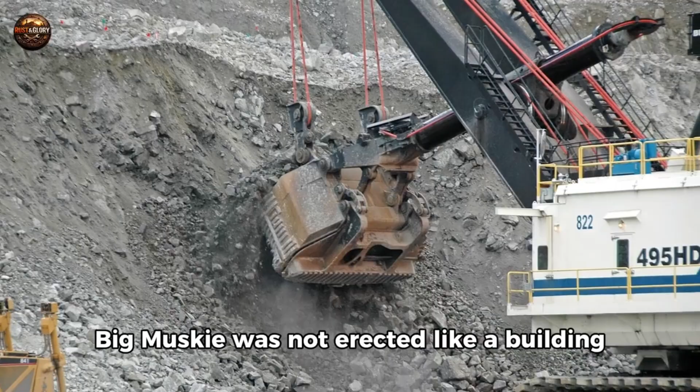Construction began in the late 1960s. The machine had to be built in major sections and assembled on site because complete transport was impossible. Even saying "assembled on site" understates the operation. Big Muskie was not erected like a building from a standard kit. It required a choreography of giant components, specialized lifting, crews who understood both the plan and the necessary deviations from the plan, and a managerial confidence that problems encountered in the field could be solved without turning into disaster.

Machines of this scale punish small mistakes brutally. A tolerance issue that might be annoying in ordinary equipment becomes existential when components weigh tons and must fit in sequences that later cannot easily be reversed. An alignment problem can ripple through the whole structure.

A field erection crew therefore has to do more than follow drawings. It has to think. This is where the South Milwaukee culture mattered. Big Muskie was built by a company accustomed to translating vast specifications into working steel. The people involved were not improvising from scratch. They were operating at the edge of a discipline they already understood well.

Once complete, the machine's scale became difficult even for experienced observers to process. The bucket alone weighed hundreds of tons. The walking shoes spread enormous load across the ground. The boom reached farther than most people can intuit without standing beneath it. The whole dragline drew immense electrical power through trailing cable rather than carrying its own fuel logic in the traditional mobile sense. It was less a vehicle than a movable industrial installation.

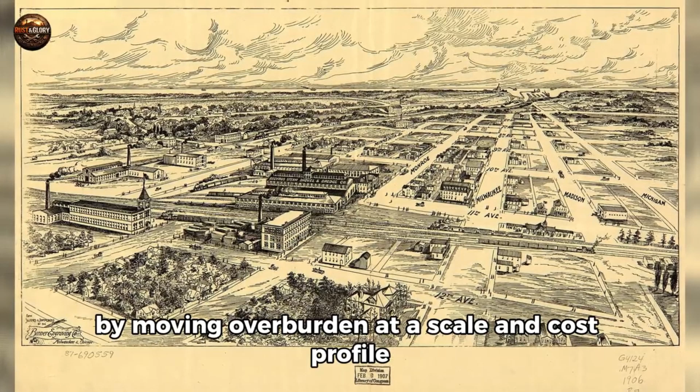And yet the work cycle remained brutally simple: cast, drag, lift, swing, dump, repeat. That repetition, hour after hour and year after year, is what converted engineering bravado into economic reality. Big Muskie's purpose was not to impress. Its purpose was to make money by moving overburden at a scale and cost profile that justified its existence. The machine did that for more than two decades. It became a functioning part of an energy system, not a temporary stunt.

Operators and crews who lived with the machine learned its rhythms the way marine crews learn a ship. Giant equipment of this kind ceases to feel abstract for the people inside it. They know the way it settles. They know what sounds normal and what does not. They know what maintenance intervals matter. They know how weather changes footing, how production shifts with ground conditions, how management optimism compares to real field pace. It becomes not an icon, but a demanding companion.

This is another reason giant machines matter historically. They create communities of expertise around themselves. Big Muskie was not just steel. It was electricians, operators, maintenance workers, planners, lubrication routines, inspection habits, replacement cycles, and hard-won field knowledge that existed because the machine existed.

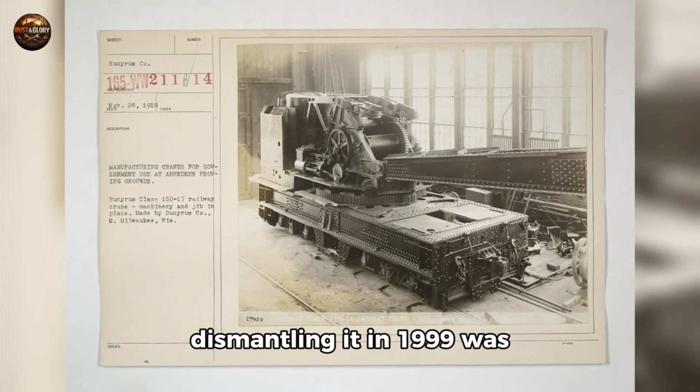By the late 20th century, however, the world that had justified such machines was changing. Environmental pressure increased. Coal economics grew more complex. Capital allocation changed. When Big Muskie shut down in 1991, it was not because the machine had become unthinkable in engineering terms. It had become harder to justify in financial terms. Those are not the same thing, and industrial history is full of systems that die for the second reason while remaining physically capable of continuing.

Dismantling it in 1999 was therefore an act of accounting as much as demolition. Keeping the machine intact offered little economic return. Scrapping it released value. Only the bucket remained to stand as a monument and an educational object. There is something bleakly modern in that ending. The world's largest dragline, built through extraordinary concentrations of labor and engineering, reduced to commodity value plus one symbolic fragment.

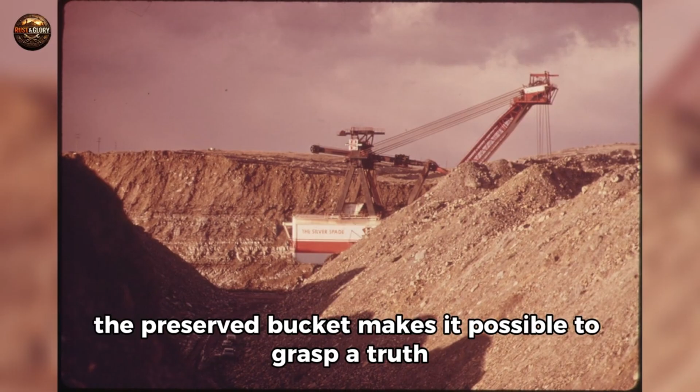And yet that symbolism matters precisely because the totality is gone. The preserved bucket makes it possible to grasp a truth the full machine once made impossible to ignore. There was a time when an American factory town could build something this vast, this specialized, and this singular because a whole industrial culture existed to make such things normal. Big Muskie is remembered as a monster machine. It should also be remembered as a proof of what South Milwaukee knew how to do.

If Big Muskie was the physical peak, the 1970s were the financial peak that set up everything which followed. The sequence looked rational while it was happening. That is what makes industrial overexpansion so dangerous. It does not usually feel reckless in real time. It feels responsive. The 1973 oil shock changed the energy conversation almost overnight.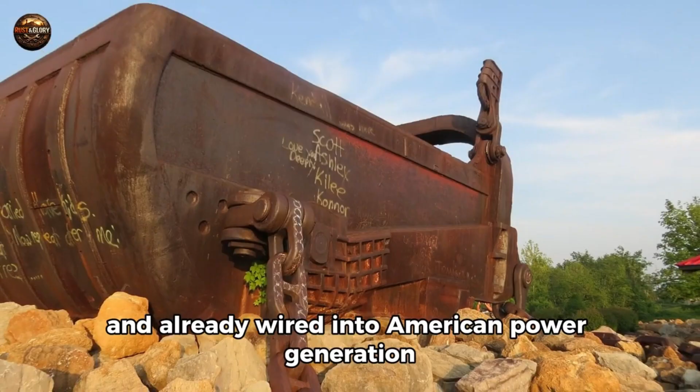Imported oil suddenly looked strategically dangerous. Coal, by contrast, looked domestic, abundant, and already wired into American power generation. Utilities moved to secure long-term supply. Mining companies expanded expectations. Capital surged into coal. And when the world decides it urgently needs more coal, the companies that build giant stripping shovels, draglines, and drills begin to look indispensable.

Bucyrus-Erie was one of the clearest beneficiaries of that shift. Orders surged, backlogs lengthened. Management faced the kind of problem executives tell themselves they would love to have: more work in the queue than present capacity could handle in any reasonable time frame. By the mid-1970s, the backlog reportedly reached levels that implied years of future production already spoken for. Looked at from the boardroom, the conclusion almost wrote itself: build for the future that is visible in front of you.

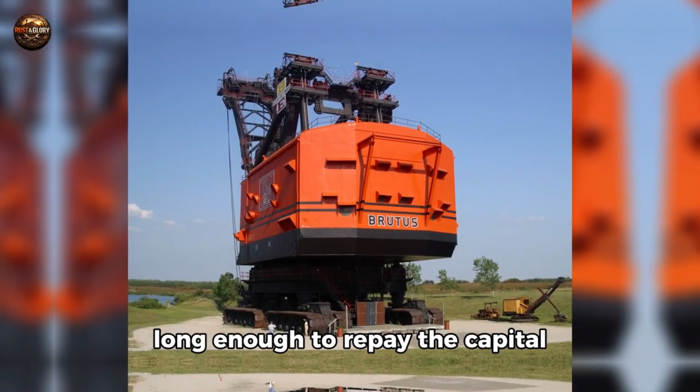So Bucyrus-Erie expanded aggressively. Plant area increased, capacity was added, infrastructure was built to support projected volumes. The company behaved like a firm that believed the new demand environment would persist long enough to repay the capital it was locking into place. And for a while, the evidence seemed to support that belief. Revenues climbed, production remained strong. The expansion looked not like speculation, but like industrial discipline.

This is where commodity industries punish confidence. Because the danger in cyclical booms is not that companies fail to recognize the boom, it is that they internalize it. They begin to treat temporary conditions as structural ones. They convert demand spikes into fixed obligations: buildings, equipment, payroll structures, debt, maintenance burdens, and all the overhead that remains when the orders thin out. That is what Bucyrus-Erie did.

The company had built its strength for decades around technological depth and strategic patience. In the 1970s, it made a decision that substituted macroeconomic optimism for those older habits. It scaled not only production but exposure. Then the environment changed. Coal did not disappear, but the certainty around it began to erode. Oil prices moved differently, regulatory burdens increased, environmental politics hardened, new generating assumptions came under pressure. Mining companies became more cautious with capital. The great build-out logic of the mid-1970s no longer looked inevitable.

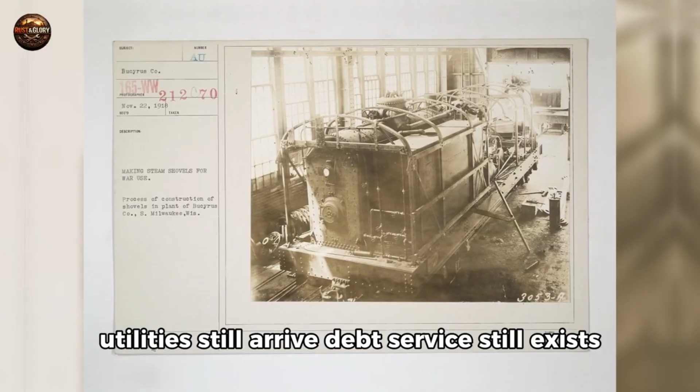And unlike variable costs, fixed industrial costs do not politely step aside when demand softens. Buildings still require maintenance, skilled workers still require wages, machine tools still depreciate, utilities still arrive, debt service still exists. A capacity structure created to serve a peak becomes a burden when that peak recedes. Bucyrus-Erie had built itself for a world that did not fully arrive on the timetable it expected.

The consequences were painful and slow. Facilities were sold, shuttered, or consolidated. Product focus narrowed. The company retreated toward core competencies because it had to. None of this meant the engineering had failed. The machines still worked, the customers who needed them still respected them. The institution's problem was now structural rather than technical.

This distinction is crucial. Industrial decline is often narrated as though a company forgets how to build. Much more often, it remembers perfectly well and still gets crushed by the mismatch between its cost base and the market that now exists. Bucyrus-Erie entered that zone in the 1980s. The giant machines that had once made it look invincible now tied it more tightly to customers in industries whose own economics were under pressure. Surface mining remained important, but it was no longer the unquestioned growth frontier it had appeared to be in the years immediately after the oil crisis. The company had concentrated enormous resources around a future that had become uncertain.

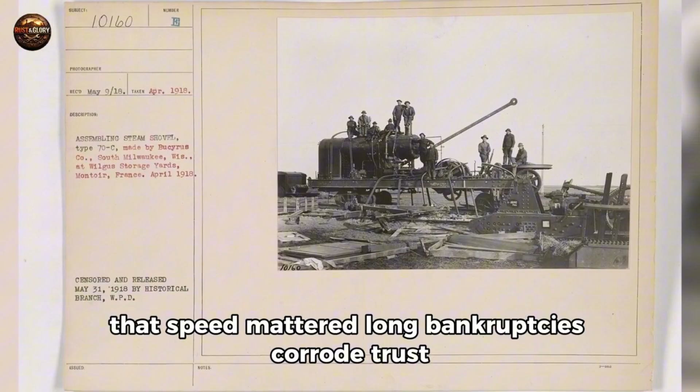That speed mattered. Long bankruptcies corrode trust. Customers hesitate to place long-horizon orders with a manufacturer that may not look the same by the time delivery arrives. Suppliers tighten terms, talent drifts, competitors exploit uncertainty. Bucyrus did not permit that uncertainty to linger for long. The restructured company that emerged was narrower, harder, and more focused. Product lines were rationalized, non-core assets were gone. The identity that survived was the one that had always mattered most.

Giant surface mining systems, drills, and the highest-end excavation technologies that relatively few manufacturers in the world could match. This is an old industrial pattern and an unsentimental one. In boom years, companies tell themselves they are diversified. In crisis years, they discover what customers actually cannot replace. For Bucyrus, that answer lay at the top of the scale curve. Then the company did something that separated it from firms merely trying to survive. It went back on offense.

In 1997, it changed its name to Bucyrus International, a subtle admission that the old regional logic no longer described the business accurately. The word Erie disappeared from the corporate title, which was symbolically significant and emotionally costly if you cared about industrial heritage. But the name change also announced a strategic ambition. This was no longer a legacy maker nursing old glories. It meant to act like a global consolidator.

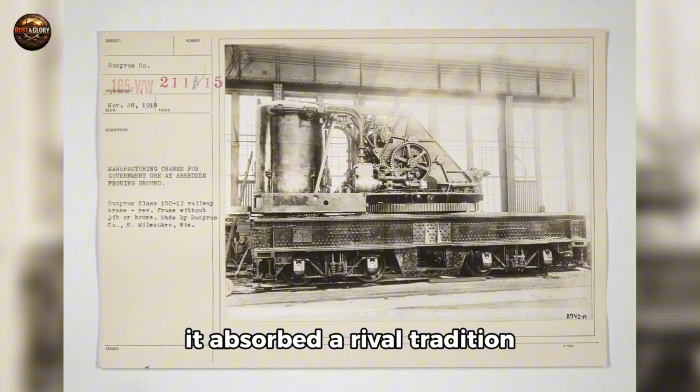And almost immediately, it proved it by acquiring Marion Power Shovel. That was a remarkable move. Marion was not some peripheral asset. It was a historic competitor, another American giant in the world of enormous mining machinery, builder of its own titanic equipment, and a company with deep engineering prestige. Buying Marion did more than increase market share. It absorbed a rival tradition. It brought in designs, relationships, expertise, and one of the last major names capable of contesting the upper end of the field. This acquisition changed the competitive landscape profoundly.

After Bucyrus absorbed Marion, the number of Western companies able to build the largest mining machines on Earth shrank even further. The industry was no longer crowded. It was concentrating around a handful of giants, and Bucyrus intended to be one of them.

The same pattern continued in the 2000s. In 2007, Bucyrus acquired DBT, adding major underground mining capability and moving below the surface in a strategic sense. Until then, the company's greatest prestige had come from vast visible machines, shovels, draglines, drills, and surface systems. DBT brought long-wall equipment, armored conveyors, roof supports, and the machinery of underground extraction. This was not adjacency for the sake of adjacency. It was vertical integration across the mining process.

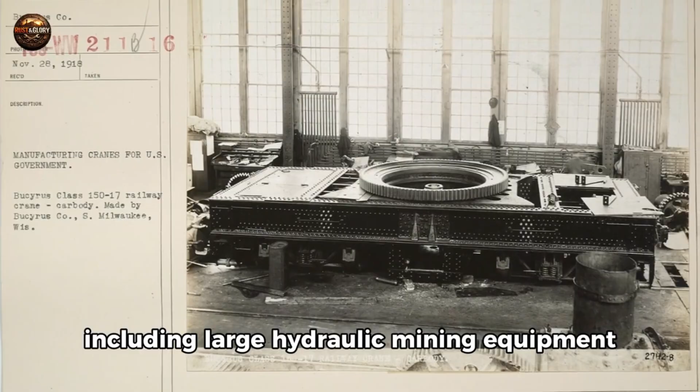Then came the 2010 Terex mining acquisition, which brought another major set of product lines into the fold, including large hydraulic mining equipment. That move significantly expanded Bucyrus's range and pushed the company closer to full-spectrum mining system status. Surface, underground, hydraulic, rope shovel, dragline, drill. A customer could increasingly imagine one supplier covering far more of the total problem.

By then, the company that had gone bankrupt in 1994 had become something unexpectedly formidable. This kind of resurgence tells you something important about what bankruptcy had actually revealed. It had not revealed technical decline. It had revealed a bad structure around good capabilities. Once that structure was reset, the company's engineering seriousness and industry reputation reasserted themselves with surprising speed.

But resurgence of that kind creates its own risk. When a company becomes too strategically complete in a high-capital field, it stops looking merely like a competitor and starts looking like a missing division for somebody larger. That is the paradox of successful industrial recovery. The better you rebuild, the more attractive you become to an acquirer who can integrate your strengths into an even bigger machine. By 2010, Bucyrus had positioned itself exactly there.

It had reclaimed credibility. It had expanded its product scope. It had consolidated rivals. And it had become, once again, too important to ignore. When Caterpillar moved on Bucyrus in 2010, the logic was easy to understand. Caterpillar was already one of the defining names in construction and earth-moving equipment. But mining at the very top end, especially the extreme capital equipment side, was a different world with different customer relationships, machine types, service expectations, and engineering traditions.

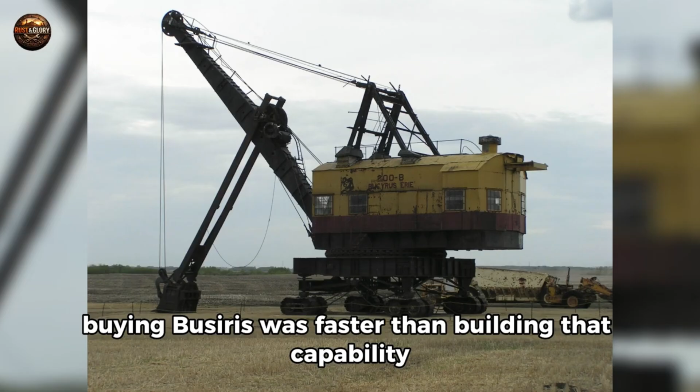Buying Bucyrus was faster than building that capability from scratch. Much faster. The acquisition, valued at roughly $8.8 billion including net debt when it closed in 2011, erased Bucyrus as an independent company. That sentence needs to be read slowly because it is the sentence industrial history keeps repeating. A company can survive depressions, wars, market cycles, technological revolutions, and bankruptcy, and still disappear because another company can use its capabilities more efficiently under a larger corporate roof.

Caterpillar did not acquire ruins. It acquired relevance. The products were rebranded. The name Bucyrus, after more than 130 years of industrial life and more than a century in South Milwaukee, was consigned to history as a living corporate identity. That is one kind of death.

The other kind came later and was harder for the town. For a while the South Milwaukee site continued under Caterpillar ownership. Work still happened. Some continuity remained. And continuity, even partial continuity, can deceive communities into thinking the center may yet hold. But the conditions that had defined the early 21st century mining business were changing again.

Commodity prices softened, global competition intensified, and large manufacturers kept reassessing where production should sit inside their broader footprints. In 2016, Caterpillar announced the closure of production at the main South Milwaukee plant.

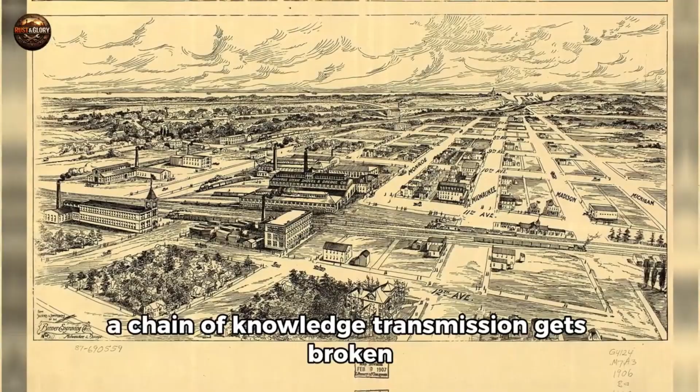An inherited assumption about what kind of work a town does becomes unstable. Younger people no longer grow up with the same certainty that the great building at the center of town has a place for them if they prove worthy of it.

In South Milwaukee, the property did not remain frozen in grief forever. Redevelopment began. Ownership changed hands. Parts of the site entered new lives.

But redevelopment is not replacement in any simple moral sense. A redeveloped industrial site may produce taxes, jobs, even energy, but it rarely reproduces the exact social and civic role played by the old anchor factory.

That is why industrial communities so often sound unresolved years after closure, even when the unemployment rate improves. Statistics can recover faster than identity.

There is a certain final cruelty in the Bucyrus story. The company that had built machines capable of stripping mountains, finishing the canal, and redefining mining scale was not brought down by engineering inferiority. It did not lose because its workers forgot their craft. It lost because industrial capitalism keeps rewarding concentration until the concentrated thing becomes worth more as an acquired component than as a self-governing whole. The name vanished first.

The factory followed. But the engineering did not completely disappear. It was absorbed into other products, other brands, other corporate systems. That is how legacy often survives in modern industry, not as sovereignty, but as DNA inside something else. For towns, that is rarely much comfort.

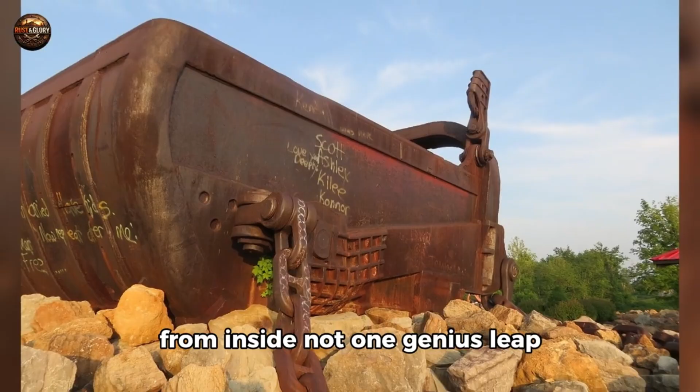South Milwaukee was not an accident of geography after 1893. It became a manufacturing ecology. Housing, utilities, clubs, schools, family life, and intergenerational labor all aligned around one industrial center.

The company did not simply rent labor there. It helped organize a town around the work and then benefited from the stability and skill accumulation that town produced in return. That reciprocal arrangement has become harder to imagine in an era of floating capital and flexible sourcing,

which is partly why stories like this feel almost mythic now. We are not used to factories functioning as civic institutions. We are used to them functioning as assets.

Bucyrus also built a certain relationship to scale. The company's history keeps moving from one large challenge to the next: railroads, dredging, Panama, war production, draglines, strip mining, giant power shovels, Big Brutus, Big Muskie, global mining integration. At every stage, the internal question seems to have been some variation of the same thing.

What does the problem require if we ignore what smaller imaginations would call reasonable? That habit can be dangerous. It can produce Big Muskie and also the expansion trap of the 1970s. It can create dominance and also create the kind of strategic completeness that invites acquisition by a larger predator. Scale is not morally good. It is simply a force multiplier. It multiplies good judgment. It also multiplies misjudgment.

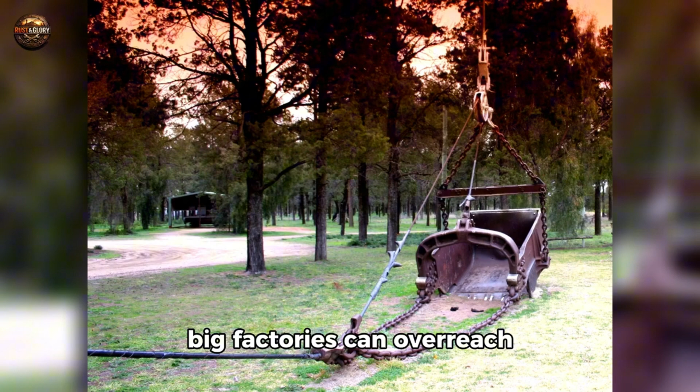This is one reason the Bucyrus story matters beyond nostalgia. It is not a sentimental fairy tale in which everything was better when factories were bigger. Big factories can overreach. They can pollute. They can tie communities too tightly to one employer. They can become vulnerable precisely because they are capital heavy and cycle exposed. Bucyrus did all of this.

The giant machines it built were marvels and instruments of an energy regime whose environmental consequences are impossible to ignore. And yet there is something worth preserving in the story beyond its romance. It is the seriousness. Bucyrus represents a culture in which making hard things well for difficult customers over long periods of time could still form the center of a city's identity. A culture in which problems were solved with metal, electricity, fabrication, logistics, and patience. A culture in which greatness could emerge from a factory town rather than from an abstract brand deck. A culture in which skill accumulated locally and visibly.

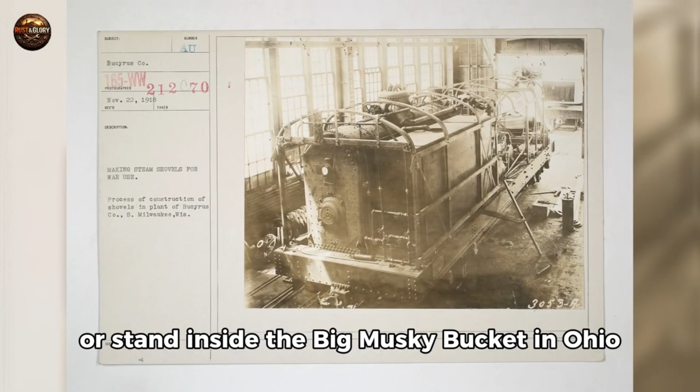When people visit the Bucyrus Museum today, or stand inside the Big Muskie bucket in Ohio, or look up at Big Brutus in Kansas, what they are confronting is not just industrial scale. They are confronting evidence that a different kind of American ambition once existed. Less frictionless, less virtual, less interested in appearing smart than in proving it by what could be built, shipped, erected, and made to work in the field. The machines are relics now, but the lesson is not.

A nation still needs the capacity to make difficult physical things. It still needs places where intergenerational skill can accumulate. It still needs organizations willing to choose depth over distraction and serious engineering over performative innovation. What Bucyrus shows is both how powerful that capacity can become and how vulnerable it is once ownership, scale, and strategic logic detach from the place that generated it.

That is why the silence in South Milwaukee in 2016 felt like more than a closure. It felt like a verdict on a whole way of organizing industrial life. The bucket survives. That is how many industrial epics end. Not with the whole thing preserved, but with one fragment too large, too strange, too historically charged to melt down and forget. Big Muskie's bucket sits in Ohio like a steel chapel to an extinct faith. Big Brutus still stands in Kansas because moving it made less sense than leaving it where it had worked.

The Bucyrus Museum keeps nearly 20,000 artifacts, drawings, documents, and memories alive inside the old Bucyrus Club in South Milwaukee. The town still carries the company in its vocabulary, whether the signs over the gates do or not. And somewhere in mines far from Wisconsin, machines with different logos still carry Bucyrus DNA forward. Electric rope shovels still bite into the earth. Draglines still walk. Drill systems still prepare the blast. The independent company is gone, but the engineering bloodline lives on inside other names.

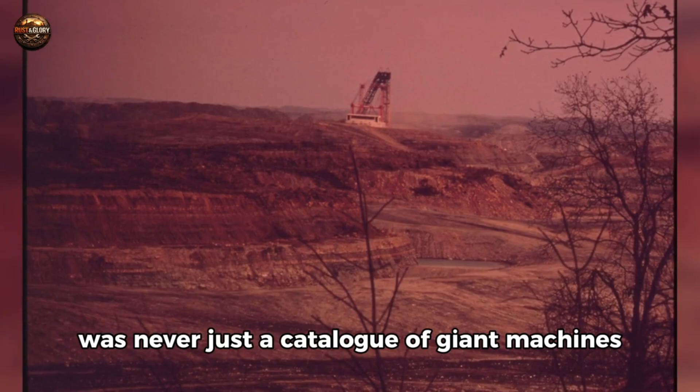That is what makes this story larger than loss. Bucyrus-Erie was never just a catalog of giant machines. It was an argument made in steel over 130 years. An argument that specialization, geographic intelligence, accumulated skill, and industrial seriousness could build not just a successful firm but an entire civic world. That world did not survive intact. Very few do. It was absorbed, restructured, renamed, and finally silenced in the place that had sustained it longest.

But for more than a century, on the edge of Lake Michigan, a factory proved that world-scale engineering did not have to come from the obvious places. It could come from a town of workers and immigrants and machinists and pattern readers. It could come from an abandoned foundry bought for $17,000. It could come from people who knew how to solve physical problems without asking first whether the solution would look reasonable from a distance.

That is why the story still matters. Because somewhere between Panama and Big Muskie, between the first rotating steam shovel and the final silent shift in 2016, Bucyrus-Erie built one of the great industrial legacies in American history. And if you want to know what American manufacturing was at its most ambitious, most disciplined, and most dangerous, you could do worse than start there. In South Milwaukee, where the biggest machines on Earth were once just another day's work.